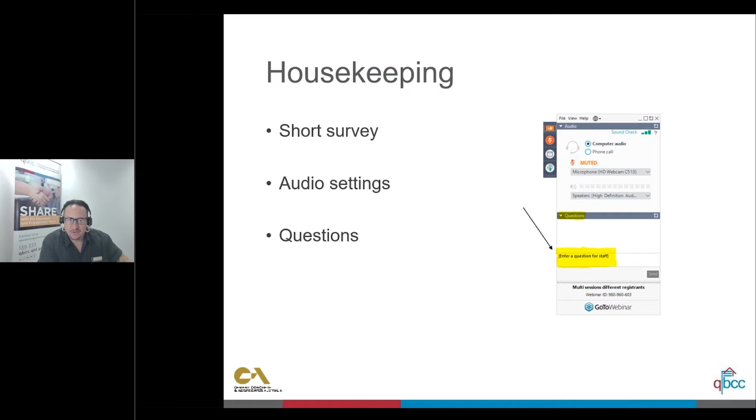Thanks, Harm. I'd like to start by saying I'm very pleased to do the presentation today. My boss is more than happy for me to spend the time on this because we put over 1 million cubic meters of concrete into the Queensland market, and if there's any problems with any of that concrete, that comes to me and my team. So I wouldn't say we've seen everything that can go wrong, but we've certainly seen a lot. And if we can improve the practices of even a few people out there, then this is a worthwhile exercise.

So some of the things we'll be talking about tonight are materials and properties, specifications, planning, finishing. We'll spend a bit of time focusing on residential driveways and paths, as well as giving you some quite good reference material on Australian building codes, standards and CCAA publications. We'll move through the slides pretty quickly, so we've got time for some Q&A at the end as well.

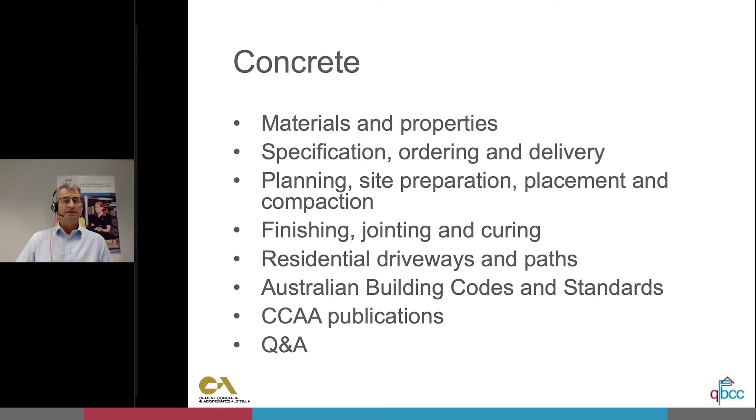So just talking about materials and properties, for everything to come together well and produce a product that the customer is happy with, we need to get all of these things right. There's materials, the concrete, the construction and the design. The materials, I think people are aware, covers aggregates, cement, and when I say cement, I'm talking generally about cementitious products. So that covers things like GP cement, fly ash, and ground blast furnace slag.

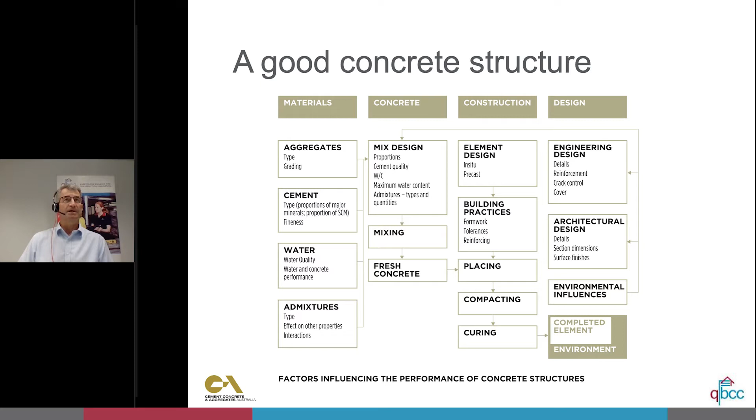Obviously, water and admixtures also go into making up the concrete. It's my team that looks after the mix design of the aggregates, cement, water, and admixtures. Once we design that, it all gets mixed at the concrete plant and gets delivered in the concrete agitator truck. And then it's up to the concrete placers to place it and do all the right things in planning, including compacting and curing, which we will talk about during the presentation.

But the design is a very important part of it as well. So just to give an example, we supplied concrete to a walling system down the Gold Coast, and that walling system was made of a concrete fibre product, a fibre board with gussets joining the two boards. The idea is you pour the concrete, and then that becomes the finished product, and you can paint the fibre board. That was done, and people moved into the apartments.

But what happened was that when the light was coming through a certain way, you could see very fine cracks. So we had to engage an engineer to help us figure out why this happened. And it really came down to two things.

The customer had ordered a block fill product for filling the walling formwork, which was, as I said, a permanent formwork. And although the block fill product is great for filling blocks, it's a fairly sandy wet mix, and therefore has a fairly high shrinkage.

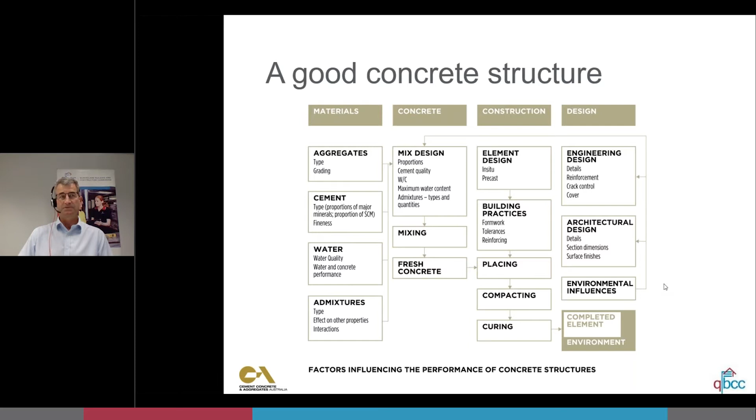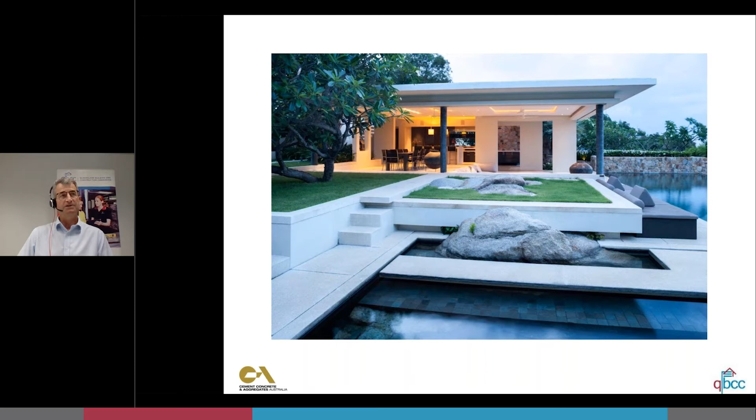So concrete, as you know, is made up of the raw materials that we spoke about earlier, and it exists in plastic and hardened state.

There's this dormant period, generally during the batching and delivery period, and then there's a setting period where it goes through an initial and then a final set, and then finally after 5 to 6 hours or so, it goes through a hardening period where it gradually gains its final strength. So typically concrete will get about 60 or 65% of its 28-day strength in 7 days.

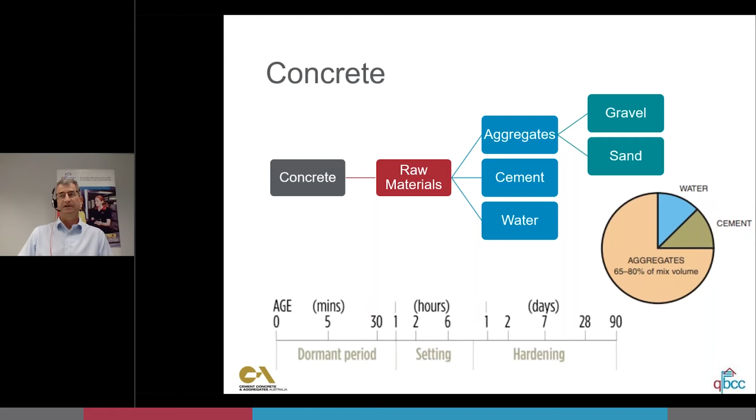And once it gets the 28-day strength properties, it'll get a little bit more, up to 56 and 90 days, but generally only 1 to 3 or 4 MPa. So you can count on about 60-65% in 7 days, and then the majority of the strength at 28.

So when we order concrete, one of the most important things is the workability of the concrete, and the workability needs to be specified in a way that's suitable for the placement method.

Typically when we talk about workability, we're talking about slump. You can see this little picture on the left. The slump test is a measure of workability, and what you do is you fill the slump cone with concrete in layers while you rod it to compact it, and then you lift that cone up slowly, and the slump measurement is the amount that it drops from what was the top of the cone down to the top of the puddle.

So this is fairly high slump concrete, this is 180 millimeters. If you look over on the right here, this is 80 millimeter slump. So this is much more typical of what might be used for housing slabs or driveways.

Although the concrete standard AS 1379 does say that if no slump is specified, then the default is 80. I think it's recognized that most placers prefer 100 millimeter slump, and there's a benefit in doing that because you avoid the temptation for the placers to add excess water.

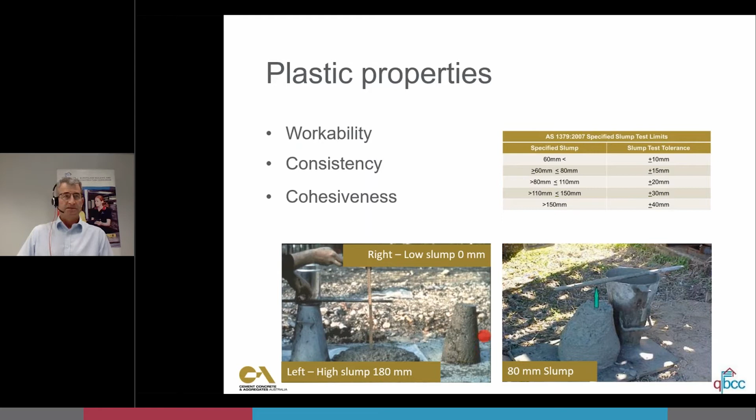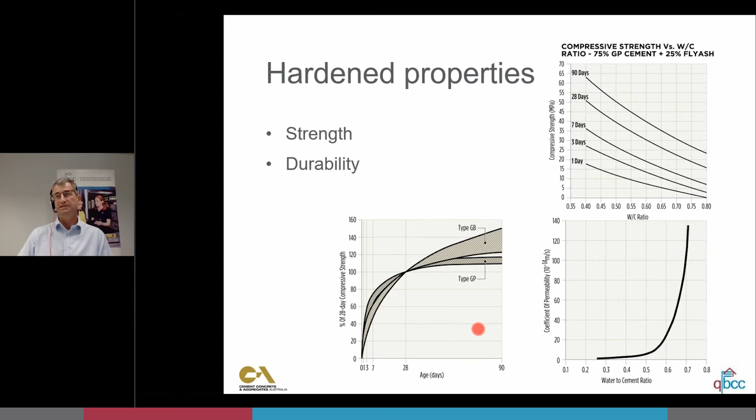This little graph here on the left talks about the type of cement. I mentioned at the start of the presentation that when I talk about cement, I'm using it as an inclusive term that includes supplementary cementitious materials, or SCMs, such as fly ash and slag. So when you mix GP with these SCMs, you have what's referred to as a GB cement, which gives less strength gain early on, but a longer strength gain later. It's worth pointing out that the use of those SCMs is very important as a durability enhancer. In fact, Queensland Main Roads insist that we use a certain amount of fly ash in concrete, because they recognise that fly ash not only helps the workability of the concrete, but it also assists in improving the durability.

So we'll talk a bit about specification, ordering, and delivery. The standard we use as a concrete supplier is AS 1379, and that covers all of the things on this slide.

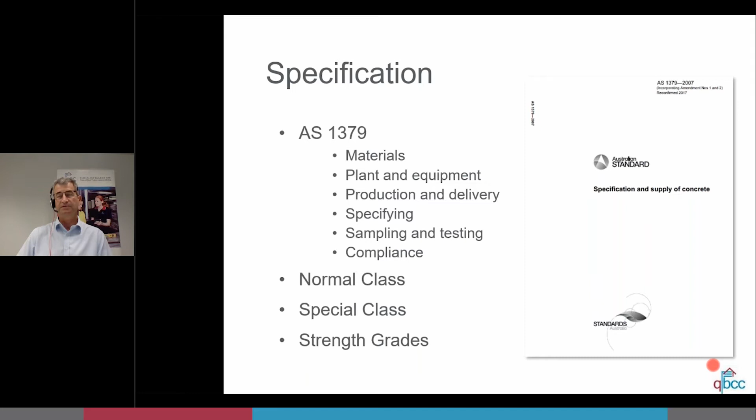We'll look at the next slide and talk a little bit about the difference between normal class concrete and special class concrete, and the sorts of things we need to know as a concrete supplier. Normal class concrete is generally covered by these grades: 20, 25, 32, 40, or 50 MPa.

The other things we need to know are the slump, or workability, which should be related to your placement method. It generally won't impact the strength, so there shouldn't really be any need for engineers or specifiers to specify the slump. From an engineering perspective, the strength is required, and the slump or workability is more related to the placement method.

The maximum nominal aggregate size, typically in Brisbane or Queensland, is either 10 or 20 millimeters. Down in Melbourne, they sometimes use 14 millimeter.

Method of placement can be chute, pump, spray, or tremie. We need to know the rate of placement, so we know how many trucks per hour to send. Whether or not you want testing is also important, and you don't really need to talk about air entrainment. We can add a little bit of air into lower strength concrete just to aid finishability, but we don't normally add it for any other reason.

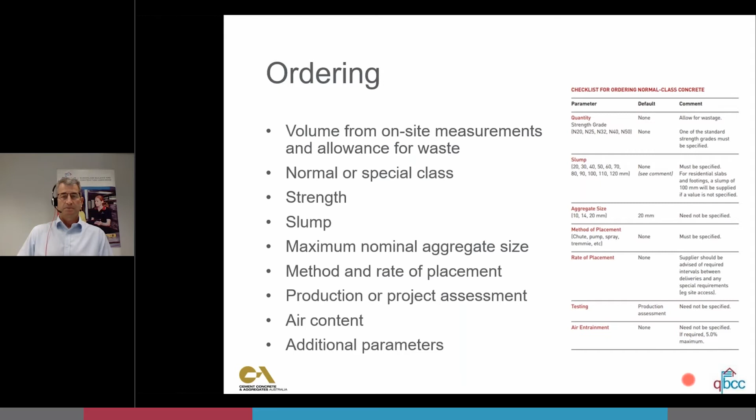We'll go to the next slide, which looks at delivery. These are some of the things we need to control as part of the delivery of the concrete. We have to make sure we control against segregation and loss of workability, make sure the concrete's within the temperature range of 5 and 35 degrees, and discharge within 90 minutes of mixing.

There's normally a delivery docket. Sometimes that's electronic, but more often than not it's a paper docket - though some concrete companies are now working towards electronic dockets or paperless deliveries. And the method of transport, I'm sure you're all familiar with the concrete agitator truck.

When I say uncontrolled water is a bad thing, I should note that under 1379, you are able to add water as long as the slump is below the required slump tolerance, it's been no more than 75 minutes since batching, and you mix it thoroughly after the added water. I should also say, if you order 80mm slump but the placer likes it at 120, you're much better off ordering it at 120 slump.

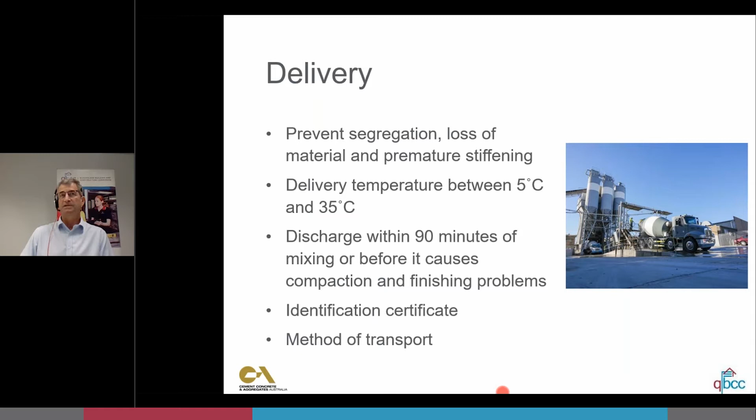This is the list of things that are impacted by uncontrolled water additions on site. Obviously the slump and workability are increased, and normally that's the point when people ask for extra water additions on site. But we need to understand it has a detrimental effect on all of these other properties.

Compressive strength will be decreased, the rate of shrinkage cracking will be increased, the risk of surface dusting is increased, the risk of segregation is increased, the volume of bleed water is increased, the benefit of compaction is decreased, the benefit of curing is decreased, durability is decreased, and permeability, as we've discussed already, is increased. So lots of things happen that are detrimental from those uncontrolled water additions.

Certainly we instruct our drivers that if the customer requests or insists on additional water being added, they are to make a note of that, and we will not guarantee strength and performance if that happens. There's a little diagram there just showing what happens to the strength as the water is added and the slump is increased.

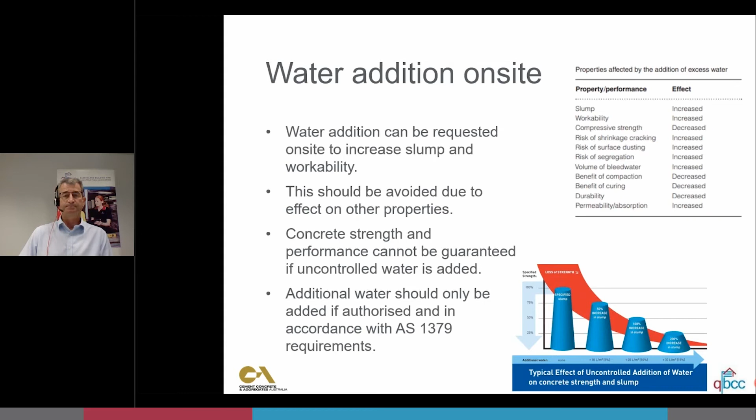So we'll talk a bit about planning, site preparation, placement, and compaction. And this next picture is a waffle slab.

When you're planning for this work, you need to do the site preparation, make sure you've got the right soil conditions for the design of the slab. You need to think about site access. Have you got enough people to place it at the rate required? What is the concrete specification? How are you going to place it? How are you going to compact it?

And certainly with these waffle slabs, it's probably a good idea to compact down between the polystyrene blocks so you don't get differential settlement. We'll talk about compaction and then planning on the finishing, jointing and curing as well, particularly the curing in the next few slides.

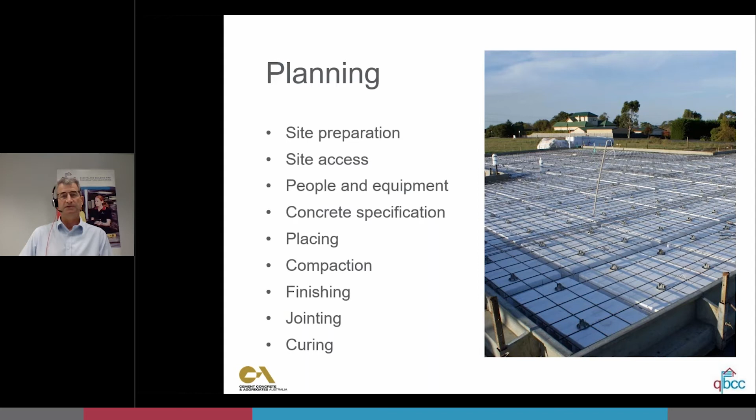So these are some of the things that need to be covered during site preparation: the site investigation, the soil conditions, soil types, excavation and fill, subgrade, subbase, vapor barrier or damp-proof membrane, formwork installation, steelwork, set cover depths.

Remember we spoke about permeability of concrete and the chloride front that gradually works from the surface of the concrete through the concrete towards the steel. That's why we have a particular cover of steel. We need to make sure there's a minimum cover of concrete, so it takes a particular length of time before the chlorides get in and attack that steel.

And we need to make sure that the forms have release agent applied. We don't want to go whacking the forms with a hammer and potentially damaging the slab in doing so.

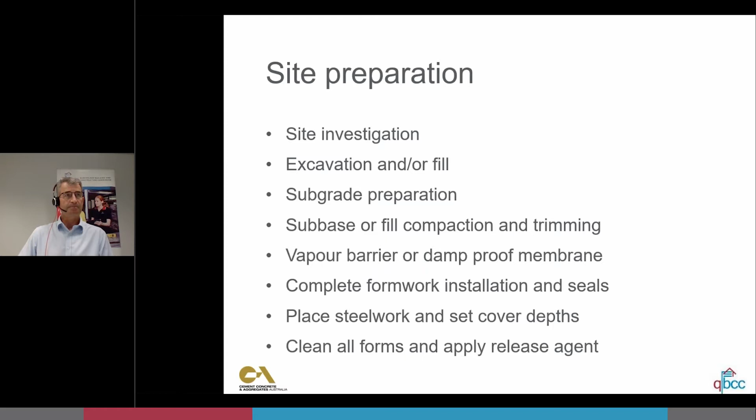So placement can be done from a chute — there's a chute in place in the picture, it doesn't look like the concrete agitator chute, it looks like something that's been jury-rigged. It can be direct from the truck, through a bucket or a kibble, most commonly through a pump, or if it's shotcrete, by spraying.

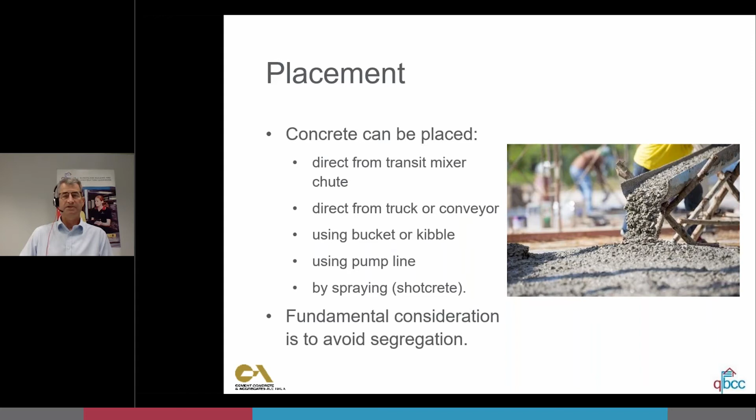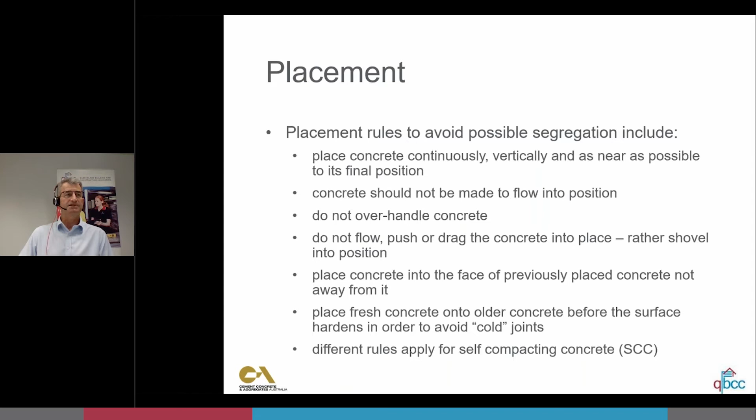A fundamental consideration is to avoid segregation, and we'll talk a little bit about placement rules. There's a few rules there, and it's probably best demonstrated through some of the pictures.

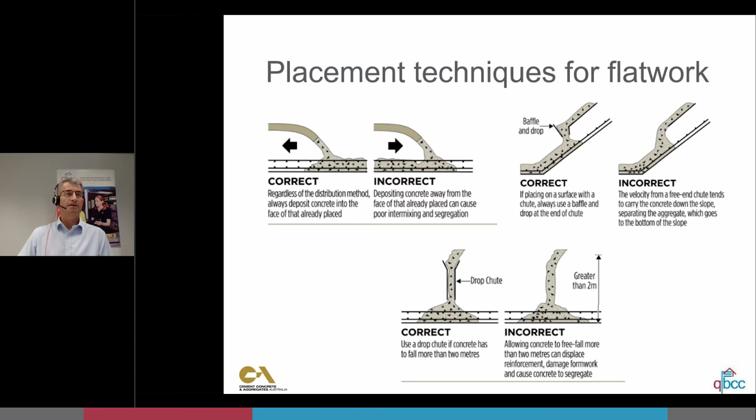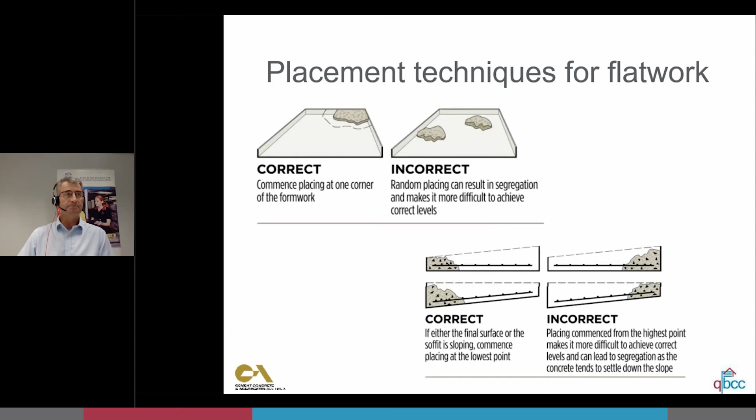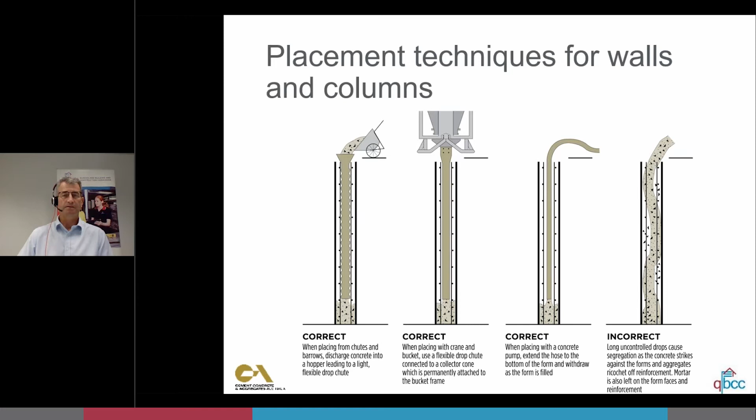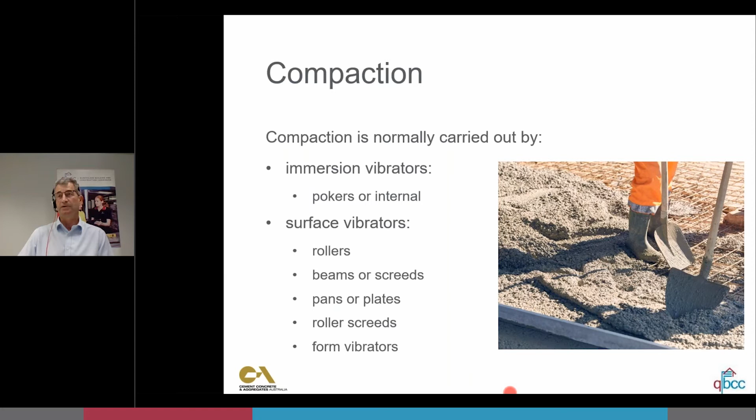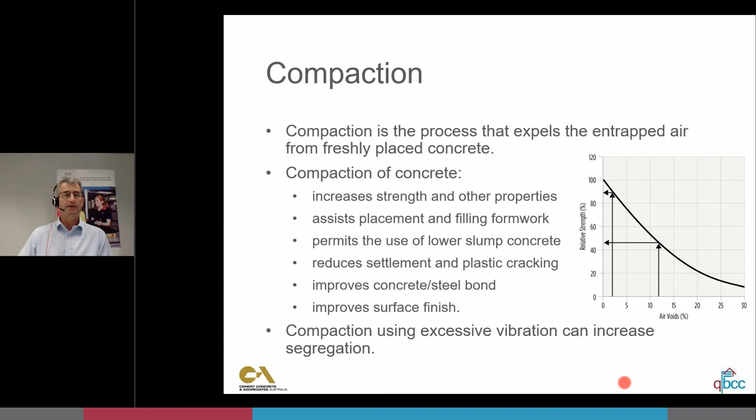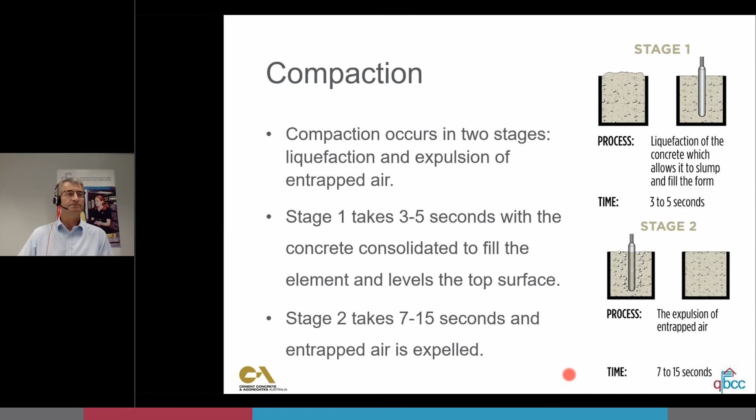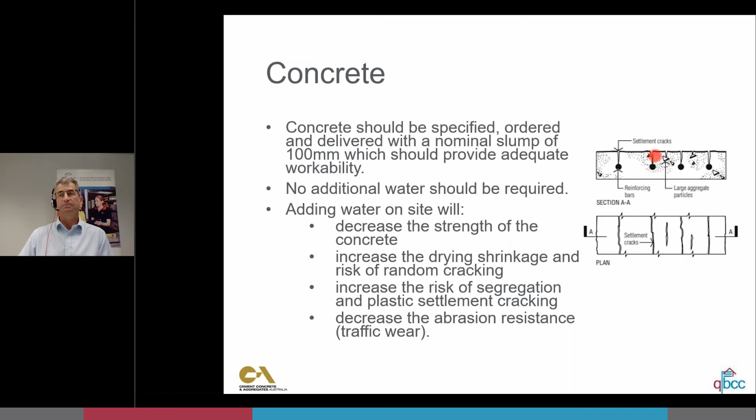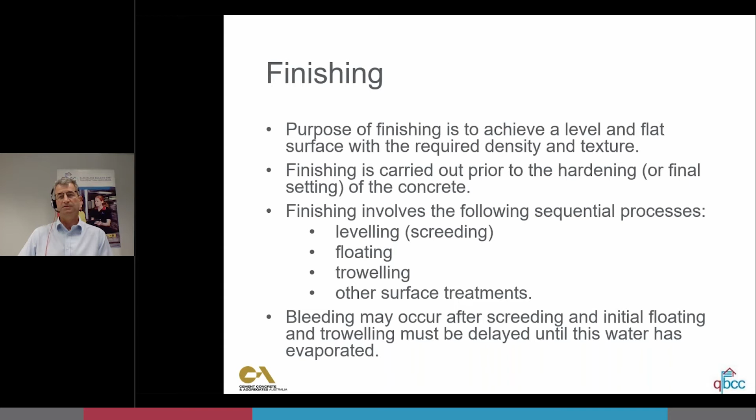What happens if we finish prematurely and we work this bleed water sheen into the concrete? Remember when we spoke about water cement ratio? If we add more water to the concrete, the water cement ratio increases and the strength decreases. If we work this bleed water sheen into the concrete, or if it rains and we work rainwater into the concrete, we're going to get a very weak surface on the concrete, and that'll show up as a dusty surface.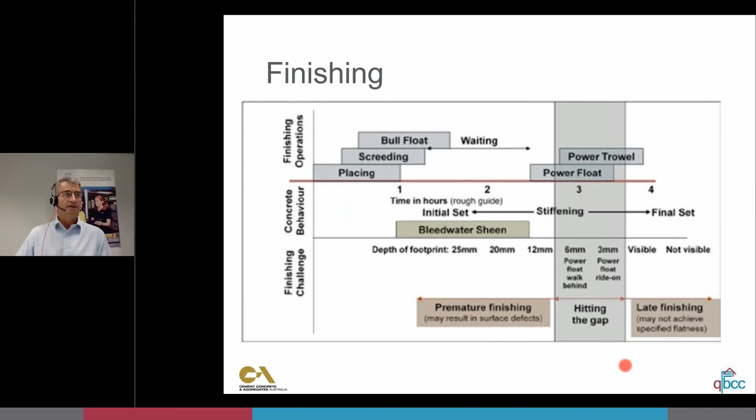When it comes to sawing the concrete, you kind of need to get on it pretty quick. So ideally the same day, or as early as possible the next day. You've probably got a bit more time in the winter than you might have in the summer. But if you don't get in there early enough with the saw cuts, you might find that the cracks have appeared where they want to.

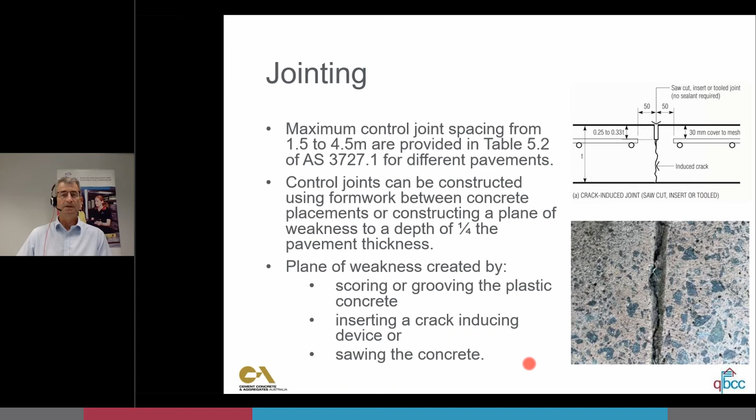Okay, so we're going to talk now about curing. So you've heard me talk about the evils of water, but water is also very important for concrete. It's just that we need to make sure it's the right amount of water. It's the amount of water that was intended when that concrete was designed. So remember I said concrete doesn't go hard through drying, it goes hard through hydrating. So it's a chemical reaction. You're getting water reacting chemically with the cementitious products.

So concrete needs water to attain its design strength. And curing, all curing is it's just about holding the water into the concrete. We don't want it to evaporate.

When it's left to cure in the air, meaning we've placed the concrete, finished it, and just walked away, we're only achieving 40% of the strength we should be achieving. If we cure it for 3 days, we're achieving over 60% of that strength. And if we cure it for 7 days, then over 70% of the strength.

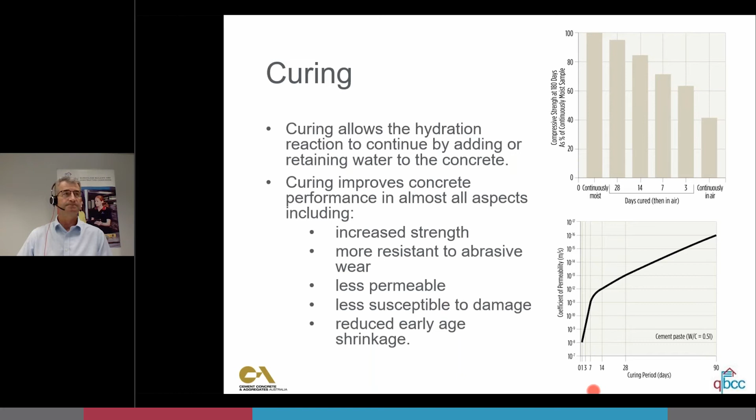I did my carport a few months ago, and I just put plastic down and made sure it was wet underneath the plastic, but it'll stay wet anyway as long as you've got it nice and tightly formed around the concrete.

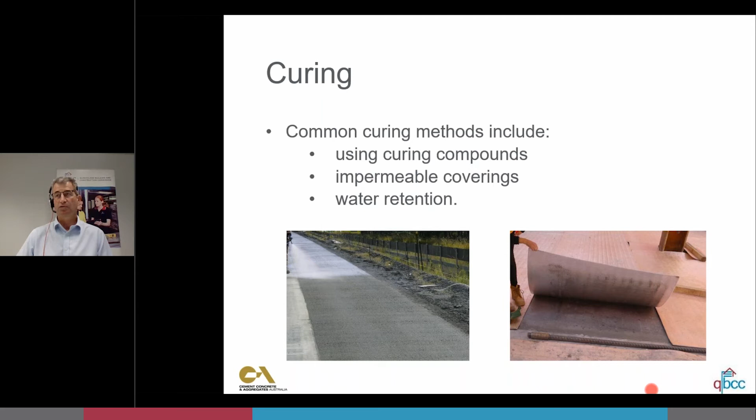You can also use a water dam, using sand or some other material to make a dam and just fill it with water. So there are all different methods of curing, and all you're trying to do is hold that water in the concrete while it hydrates.

There are quite a few different types of cracks. I've talked about plastic settlement cracking, which follows the pattern of the reinforcing steel. We've talked a bit about plastic drying shrinkage, but we're going to cover that a little bit more.

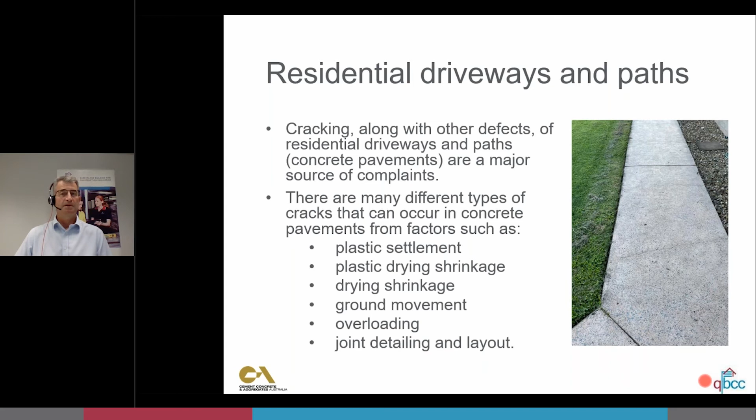We'll just look at the next slide, which gives you some reference material on the documentation and Australian standards you can look at in terms of how you control joints and what's considered a defect and what's not. Generally, if it's a millimetre or less, it's not considered to be defective.

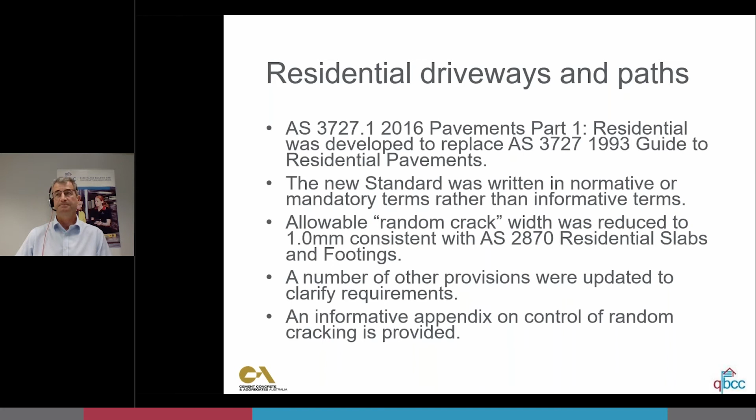Just a little note here: if you're dealing with coloured or decorative aggregates, then that's considered special class concrete.

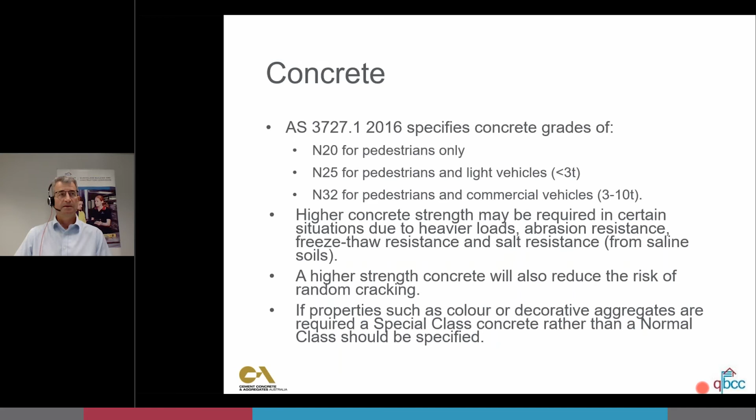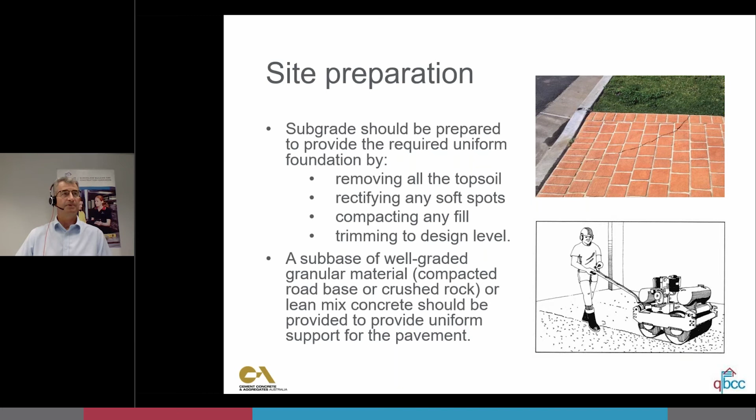There's just some notes on what you need to do for correct preparation, and a few diagrams on this side that show subgrade, sub-base, and then a layer of sand or polyethylene.

The polyethylene's quite good because it reduces the friction between the concrete and the ground, so if the concrete can shrink in on itself, it won't crack as much. It also keeps the water in the concrete and directs it up as bleed water, which is good - you don't want the water sucked into the dry ground. If you don't use polythene, it's a good idea to wet that ground down prior to the concrete going in, to make sure the ground doesn't take the water out of the concrete.

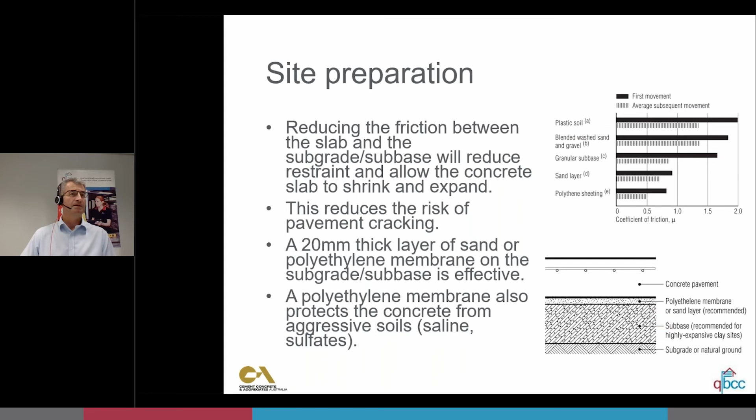This is another method of doing that control joint. This one uses a proprietary pressed metal key joint. You can see the reinforcing doesn't travel through the joint, but because of the shape of that joint, you'll avoid differential vertical movement either side of that joint.

It talks also about using bar chairs at maximum 600mm centers. Steel reinforcing should be in the top half of the pavement with at least 30mm cover to the surface and 40mm cover to the slab edge. We know why that's for - we don't want that steel too close to the surface where it's going to be attacked quickly by that moisture and chlorides.

It does say steel reinforcement shall not be continuous, but there's another diagram further on that shows where it is continuous, but it's done in a way that it's not fixed into one end.

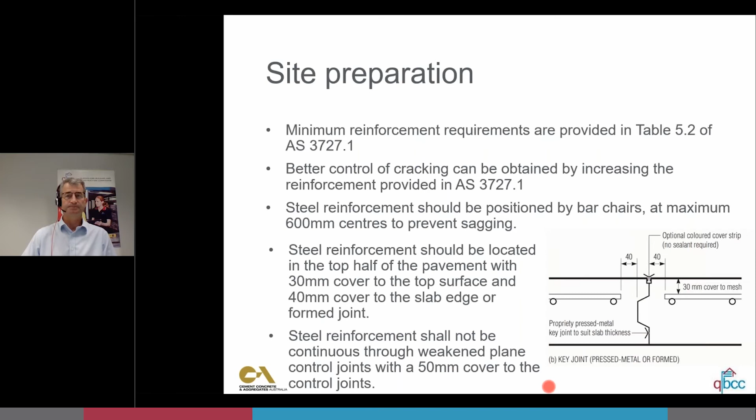So placement and compaction we've talked about. We need to be careful to avoid segregation and make sure we get adequate compaction so we don't have air bubbles causing low strength, porosity, and durability issues. Surface vibration can be done, or we can use poker vibrators, generally small or large diameter depending on the thickness of the section.

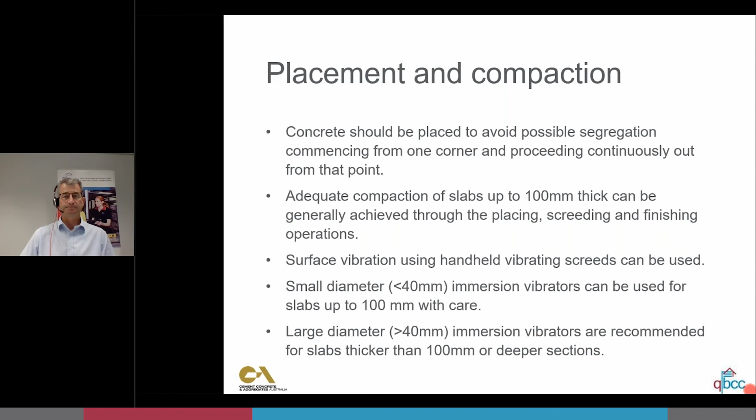Okay, plastic shrinkage cracking. This is pretty common. You can see by the picture that this cracking pattern is fairly random.

So what is plastic shrinkage cracking? Just picture a dry lake bed - you've probably all seen photos of a dry lake bed which is all cracked. That happens when the top of the lake bed dries out and shrinks while it's still muddy underneath. That's the same mechanism for plastic shrinkage cracking in concrete - we're getting drying of the surface while the concrete is still plastic underneath. So that surface layer is drying and shrinking, and if it's not drying and shrinking underneath, you're going to get cracking on the surface.

So that's plastic cracking. To avoid it, we need to make sure that while that concrete is setting, the top remains wet. That's why bleed water is a good thing - the bleed water rising up keeps that surface wet, prevents it from drying out, allows it to set with the water and gain some strength.

There's times where plastic cracking is a higher risk, and that's hot, dry, and windy conditions. There's a little diagram here that allows you to work out what the evaporation rate is going to be depending on the relative humidity, the concrete temperature, and the wind speed. Or you can just use the CCAA app that'll look at the weather conditions and tell you.

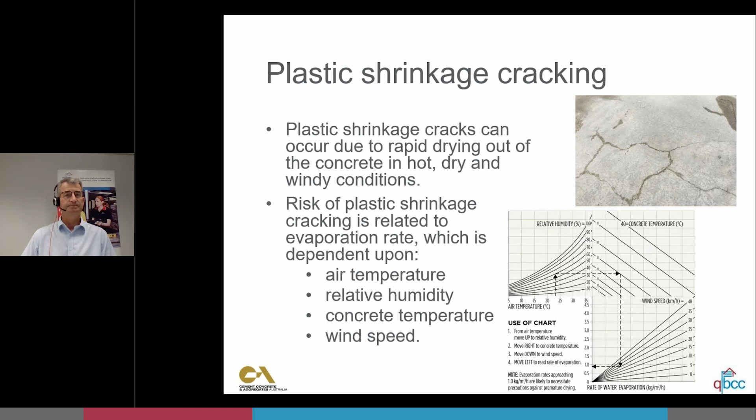Let's go to the next slide. So this is a picture of the app that's available through CCAA. It'll go and look at the weather conditions and tell you what the evaporation rate of the concrete is going to be, of the bleed water from the concrete.

You can also reduce the risk of plastic cracking by all of these things: having a higher bleed, using SCMs like slag and fly ash, use of chemical admixtures, plastic fibers. Plastic fibers, particularly the microfibers, just act to help prevent plastic cracking. Dampen the subgrade - remember we spoke about that, particularly if you're not using plastic, so the water doesn't get sucked down into the ground.

You want the water to go up as bleed water to the surface of the concrete. Change the placement time - it's not uncommon in summer for us to be delivering concrete at 3 or 4 in the morning so we avoid the risks of plastic shrinkage cracking. Cooling the concrete - sometimes we'll cool it with chilled water or ice. That'll give you longer placement times, better slump retention, and less risk of plastic shrinkage cracking. Shading the surface, erection of windbreaks, and as I said, the use of an evaporative retarder.

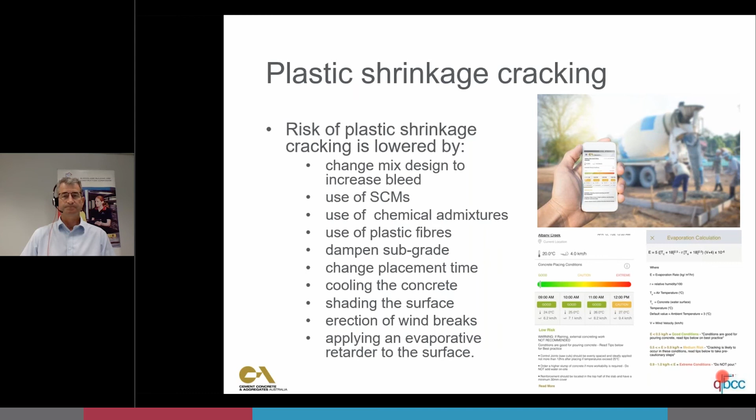So finishing. Finishing is very important, as I said earlier, for densifying that surface, giving it some resistance to wear and dusting. This looks like a broom finish. But if you're going to do a broom finish, you still need to make sure you densify that surface and get some strength there before you apply that broom finish with a stiff broom.

It talks about compaction or densification of the concrete surface by troweling, then appropriate finishing operations such as brooming or wooden or sponge float finish to avoid a slippery finish. And then the broomed finish comment down here.

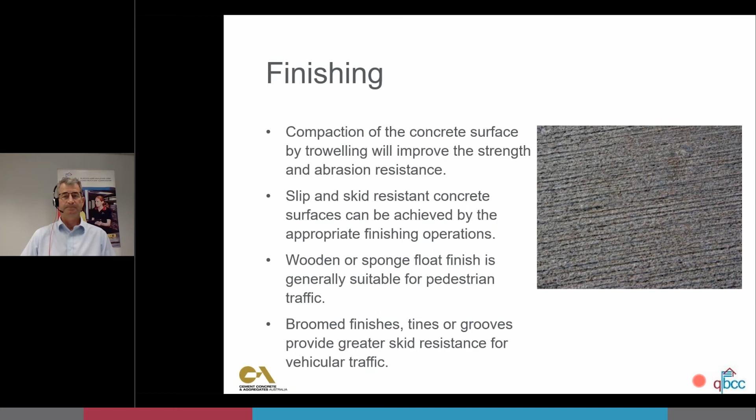Crazing - crazing is probably a little bit similar to plastic cracking, but it's more associated with a thick paste layer on the surface of the concrete. It can occur with wet mixes or overworking of the concrete surface or finishing while the bleed water is present. If you force or work bleed water into the concrete, you're going to increase the water cement ratio at the surface. You'll make that surface paste weaker and more susceptible to cracking.

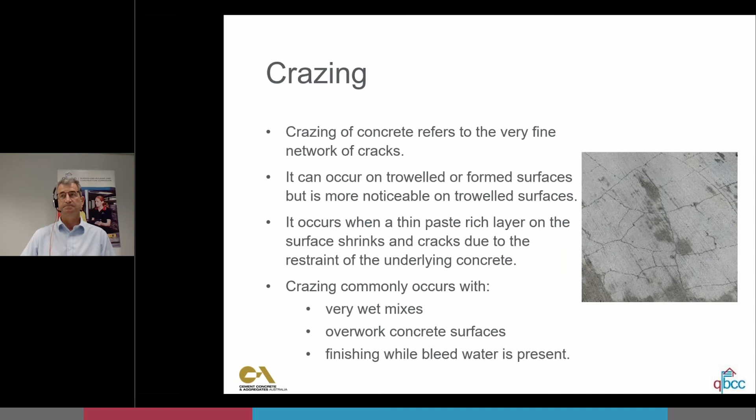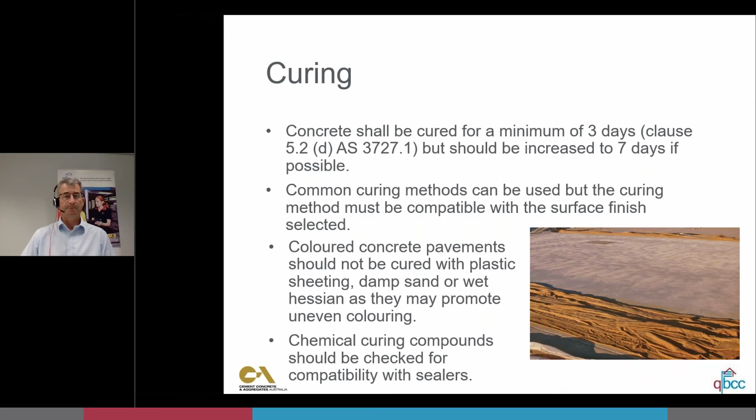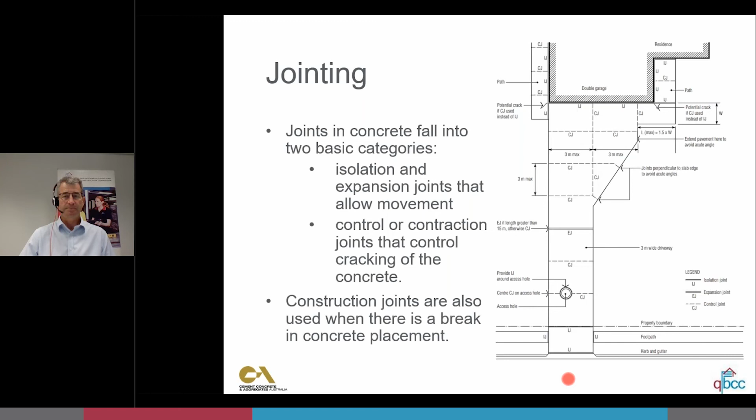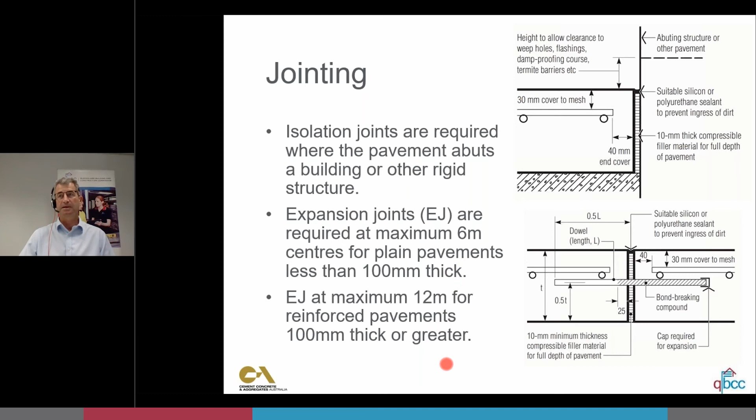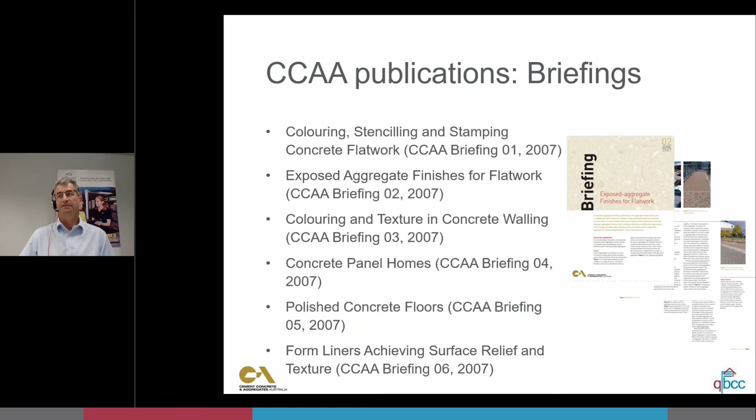There's technical publications including briefings, data sheets, guides, and technical notes. These are some examples of the briefings that are available.

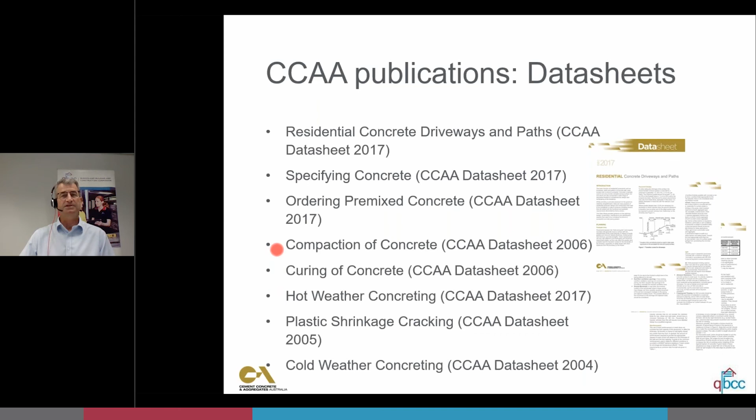These are some of the data sheets. You'll notice there's one here that covers plastic shrinkage cracking, another one that covers hot weather concreting, which we can't avoid sometimes in Brisbane, and there's also data sheets covering curing and compaction. So it's some pretty good reference material there.

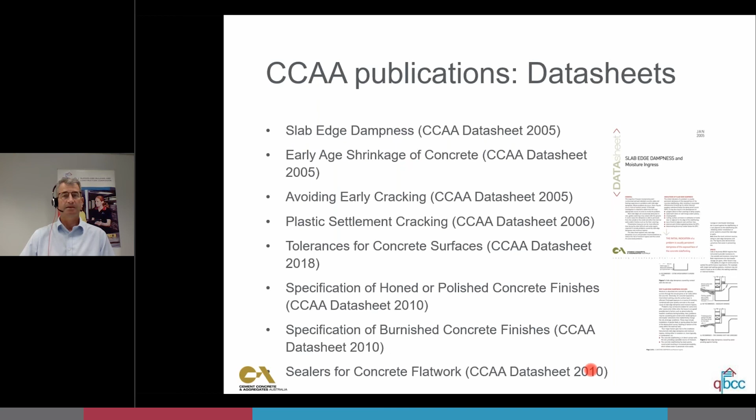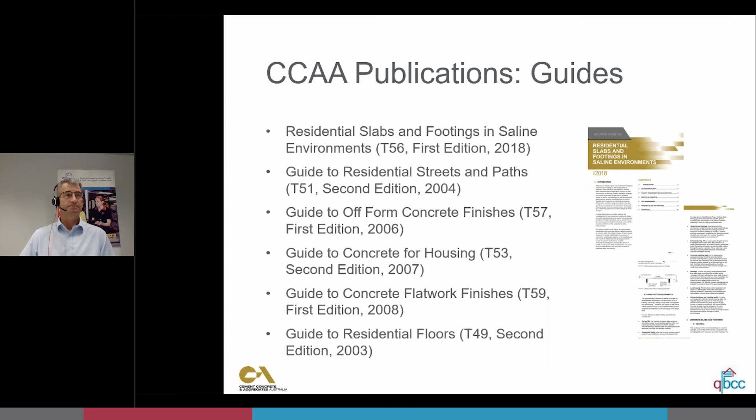And some guides. More guides. And we've got time for questions and answers. So I'll hand control back to Harm.

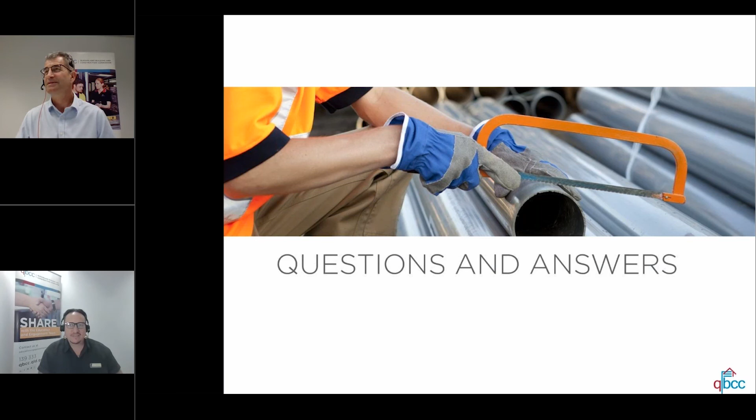Okay, super. All right, Mike, I hope you're ready. Yeah, all ready. Fantastic. Okay, so we'll go for the first question we've got here. First one is, how do I prevent efflorescence around the edges of house and garage slabs?

That's a good question. I just touched on that on the last slide, didn't I? So efflorescence is basically salts that water is carrying through the concrete, and as the water travels up, normally through the sides of the concrete, particularly if you're talking about a garage, that water is traveling in through the side of the concrete and making its way to the surface, and as it evaporates, it's leaving the salts, which is that efflorescence, that white salty finish. So the best way to avoid it is to stop the water getting into the concrete. If we turn the vapor barrier up around the base of that concrete, then the water can't get through. If the water can't get through, it can't carry those salts through the concrete.

Having said that, if you're in the situation where, for whatever reason, that vapor barrier is not in place, you can mitigate it by ordering higher strength concrete that's less porous. But if it's occurred and you can't get at a vapor barrier, if it's been removed, then it's pretty difficult to stop. So it really comes down to just constructing it in the right way to avoid it in the first place.